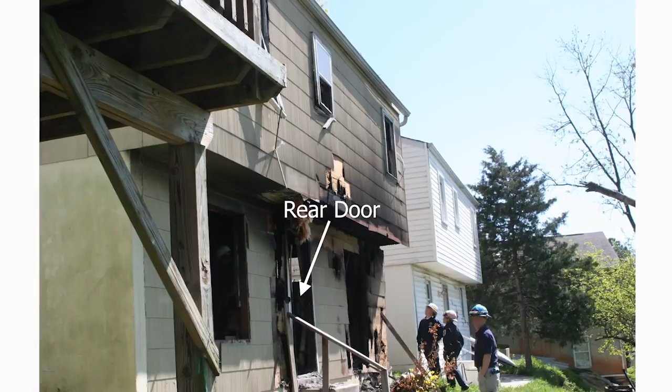This video provides an overview of an analysis conducted by the National Institute of Standards and Technology, or NIST, to provide insight into the dynamics of a fire that resulted in the injury of 7 Prince George's County firefighters. On February 24, 2012, a wind-driven fire in a condemned single-family residential structure resulted in the serious injury of an officer and forcible entry firefighter from Truck 809 of the Prince George's County Fire Emergency Medical Services Department. NIST examined the fire dynamics of this incident at the request of the department.

At 9:11 in the evening, a call was dispatched for a residential structure fire in Riverdale Heights, Maryland. Truck 809 was the first due truck and arrived on scene within 3 minutes of the dispatch. The 809 officer observed smoke moving extremely fast through the front yard and across the street. The Truck 809 officer and forcible entry firefighter proceeded directly from the truck to the front door of the structure.

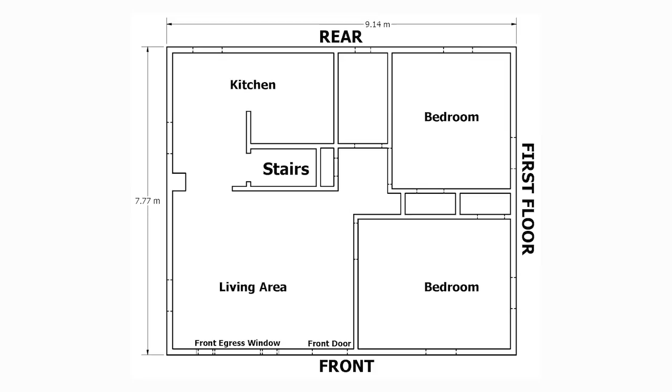Less than 1 minute after the arrival of Truck 809, officer and forcible entry firefighter, both in full PPE and SCBA, had entered the structure and began their primary search of the first floor. Smoke and heat conditions on the first floor worsened, and the front door slammed shut, trapping the 2 members of Truck 809. Within 30 seconds of the door closing, the Truck 809 officer cleared a portion of the living room window on the front of the structure and exited to the outside.

Truck 809 forcible entry was unable to self-evacuate and continued to endure the elevated thermal conditions in the living room. Although Truck 809 officer had sustained injuries and damage to his SCBA, he alerted other firefighters that his crew member was still inside. Fire attack had started from the basement door on the rear of the structure. The front door was reopened, and a group of firefighters, including the Truck 809 officer, entered the living room, found the downed firefighter, and pulled him outside through the front door.

In February of 2012, we had a fire on 57th Avenue in the Riverdale Heights community. It's a single-family house, just like any other small single-family home in the county. First arriving units reported smoke and fire showing from a basement level. It's about 9 p.m. It was a red flag day, meaning the Weather Service had instituted a red flag warning for high winds and dry conditions.

The truck and the engine arrived together. Truck crew of 2 for the inside crew went ahead of the engine line. They were going to initiate a search of what appeared to be an occupied home. They made it in a front door that had a swing opposite what you would consider. So instead of swinging to a wall, the swing was into the middle of a room. Fire was in a basement below them.

NIST's Fire Dynamics Simulator, or FDS, was used to provide insight into the dynamics of this structure fire. The results of an FDS simulation are visualized with another NIST program called SmokeView. The inputs and details for the FDS simulations are documented in NIST Technical Note 1870. The fire started in the basement near the windows on the rear of the structure.

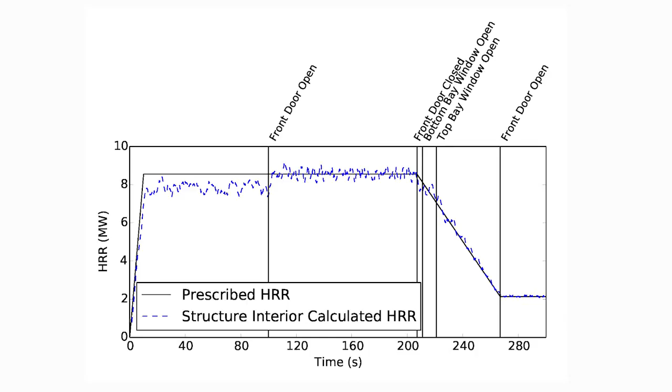Based on an assessment of the fuel load in the burned area of the basement, the estimated peak heat release rate of the furnishings and interior finish was approximately 9 megawatts. However, the lack of oxygen limited the fire growth until the front door was opened. As seen in the heat release rate graph, after the door was opened and allowed additional oxygen to enter and mix with hot fuel gases in the basement, the fire heat release rate increased, with some of the burning occurring on the first floor.

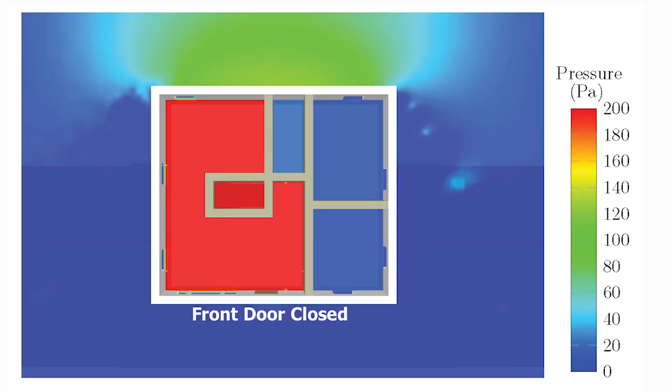The output from the FDS simulation can be used to provide insight to the flow path within the two-level structure. Fire gases move from regions of higher pressure to regions of lower pressure. Notice on the outside of the structure that the upwind side of the house, or the rear of the house, is under a higher pressure than the downwind side, or the front of the house. The inside of the house has been pressurized by the wind from the openings on the rear side and the pressure from the fire gases. Once the front door is open, the high pressure on the rear of the outside of the house and the inside of the house equalize.

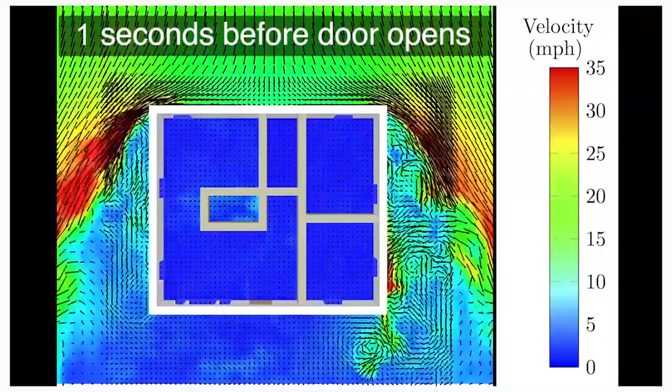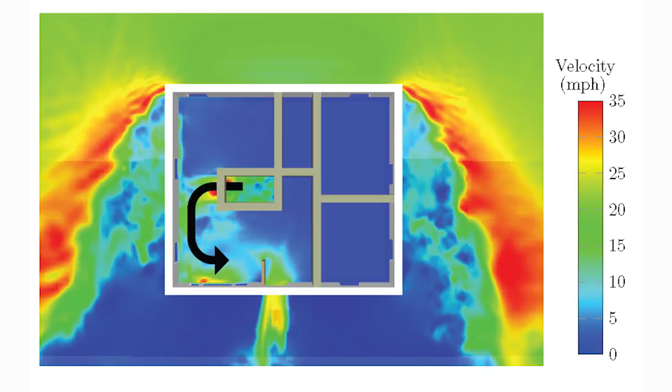One of the hazards to firefighters located in the exhaust portion of the flow path is convective heat transfer from the fire gases. Convective heat transfer depends on the velocity, the amount of turbulence, and the temperature of the fire gases. This video shows the change in gas velocity on the first floor after the front door was opened. Notice the distinct flow of hot gases from the doorway at the top of the basement stairs to the front door. An arrow shows how the hot gases traveling at 10 to 20 miles per hour would have impacted the front door and forced it closed behind the Truck 809 crew.

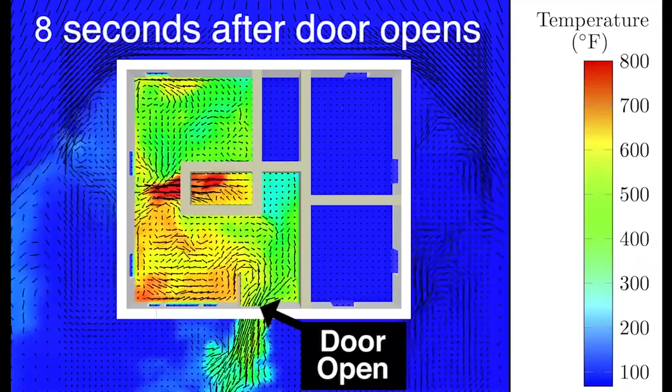This video shows the calculated change in gas temperatures as a result of opening the front door, which increased the flow and mixing of the fire gases within the house. Wind can generate hazardous thermal conditions within a flow path. Stay upwind of the fire or keep the wind at your back. Uncoordinated ventilation or uncontrolled doors can also be the cause of increased thermal hazards within a flow path.

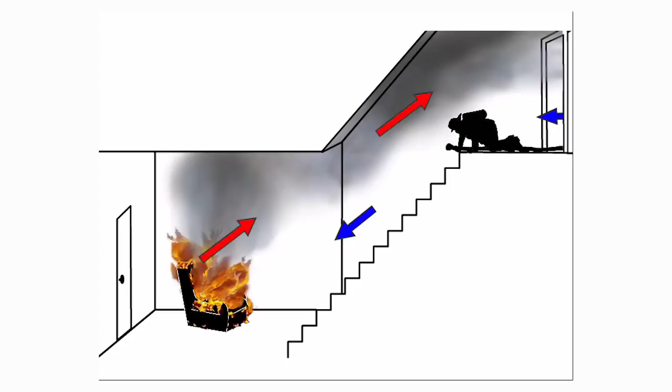When sizing up a structure fire, choose your tactics with potential flow paths in mind. Recall that in a flow path, the hot gases move from a region of higher pressure to a region of lower pressure. Firefighters located in the flow path downstream of the fire can be exposed to lethal levels of heat. Firefighters positioned in the flow path above the fire are in a high hazard and potentially deadly location. It is critical that tactics are chosen so firefighters are not caught in this position.

Research has been conducted by NIST and UL with fire departments across the country on exterior fire attack. The studies have shown the importance of scene size-up prior to beginning interior fire operations in order to choose tactics that would not only be the most effective, but also increase the safety of the operations. The experiments in single-family homes have shown that once the basement fire was located during size-up, the most effective fire attack was made from the same level.

For more information on this incident, see Prince George's County Fire and EMS Department Safety Investigation Team Report and NIST Technical Note 1870. These reports and other information on fire dynamics, flow paths, and wind-driven fires can be found on the NIST Firefighting Technology website.